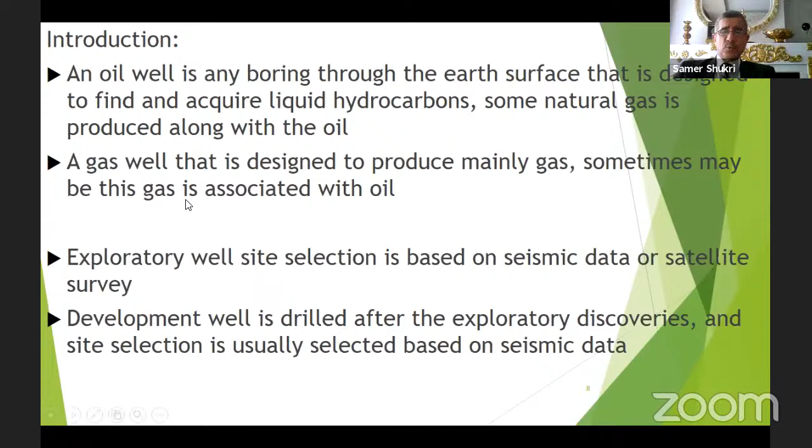You have huge fields in Iraq, like the Qurna field. What else? Kirkuk also, it is among the biggest fields in the world. Also many fields that can be developed. So after exploration, you have to develop this field and drill more wells so that you can produce this oil and gas during, for example, 30 or 40 or 50 years, plus or minus. In this case, you are working professionally and you plan production for each well.

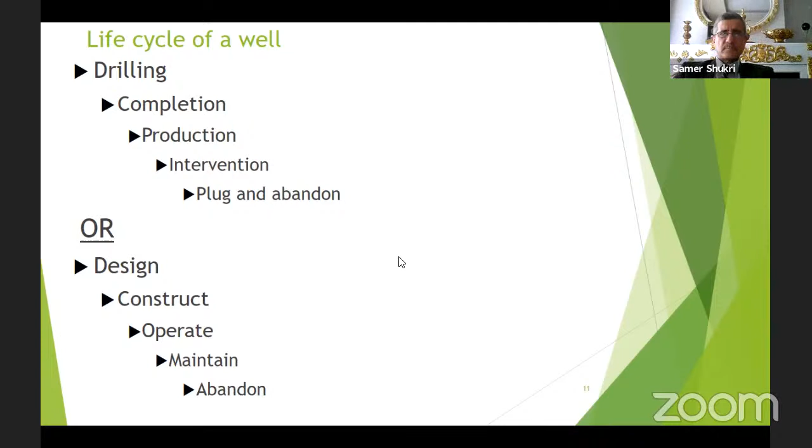Here you see well construction, it includes drilling and completion, then production, then maintenance. We have this maintenance, well intervention. Well intervention, we have 9 methods. Today we will study 3 of them. So workover is part of the well intervention methods, and the lifetime extension. We can extend the lifetime of the well as much as we can. Then plug and abandonment.

Here I will just tell you something about the well control certificate. I deliver courses for it. In the future, you are required to get this certificate if you want to work. We have 2 types, drilling and well intervention. You have to study these 2 mandatory subjects: completion equipment and completion operation. Then if you want to work in wireline, operator or supervisor, you have to do the wireline exam. If you want coil tubing, that is optional also. If you want wireline and coil tubing, you will do 4 exams.

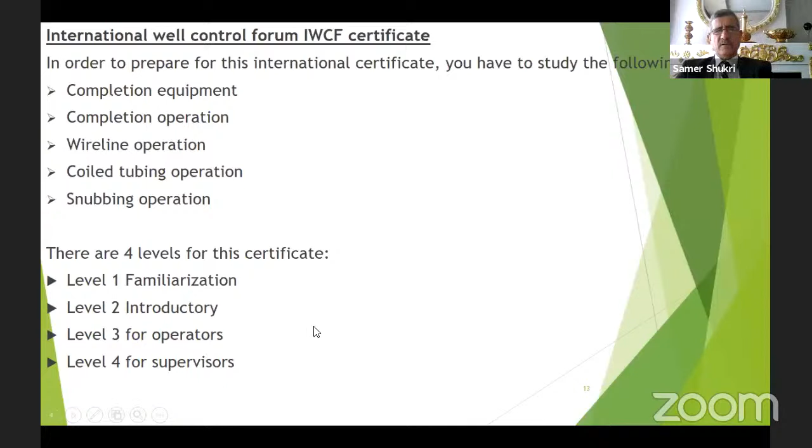We will talk now about wireline operations. Let us play this video.

Like many operations in the oil and gas service industry, wireline operations is a 24-hour-a-day job. Crews may work long hours in any type of weather to respond to customer needs. Wireline operations usually involve lowering and retrieving specialized equipment into the well, some for testing and some for plugging off zones in the well. Here, a 3-man crew shows us how a slick wireline is set up. First, by installing the blowout preventer on top of the well.

This is the lubricator. This is the slick line.

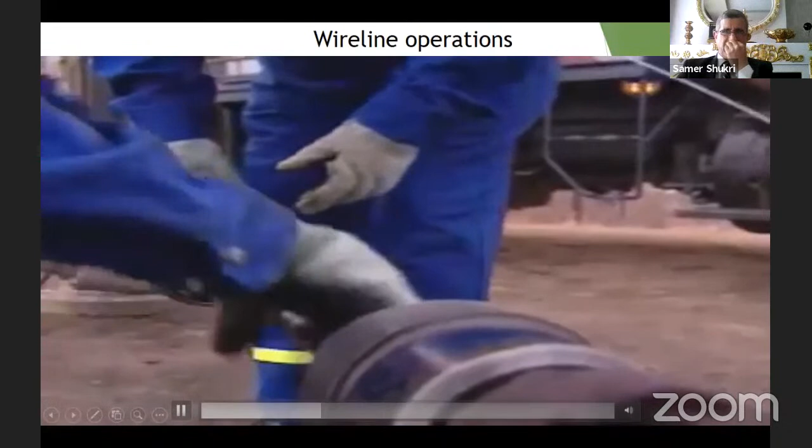Then the wireline equipment is assembled on the ground and the wire is threaded. Some can hold over 2,000 pounds and reach depths of 30,000 feet. After the string is together, a crane lifts the unit into place where it's secured to the top of the wellhead.

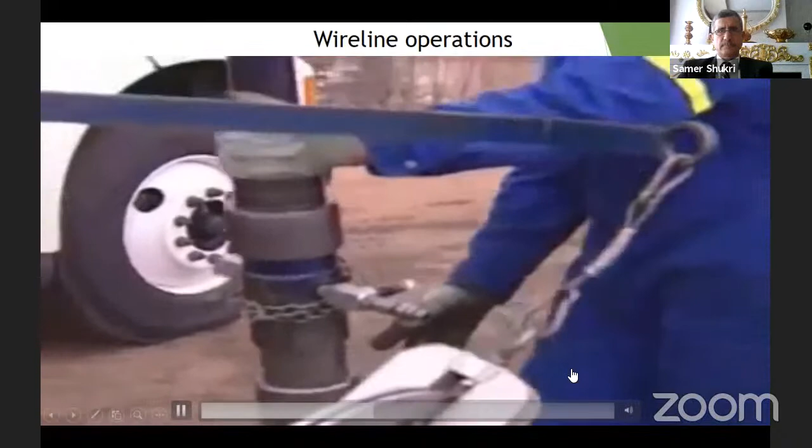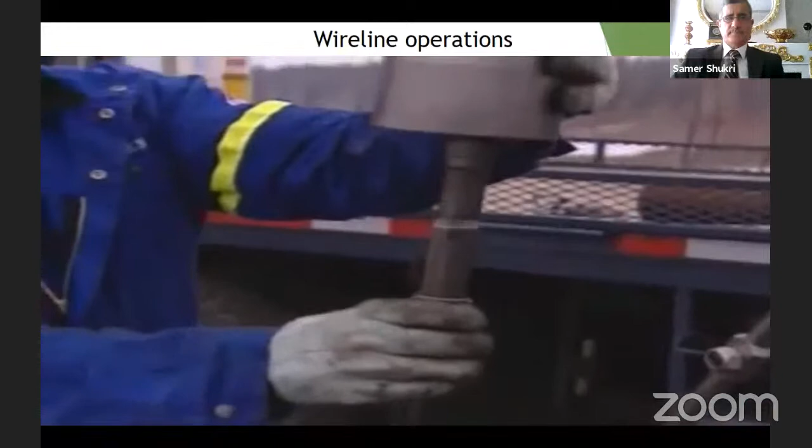You see, this is the rig up of the equipment. Once the pressure is bled, the wellhead is opened and the wireline is run into the well. At this site near Caroline, they're actually using slick wireline to retrieve tools that have become stuck deep inside the well during another company's service work.

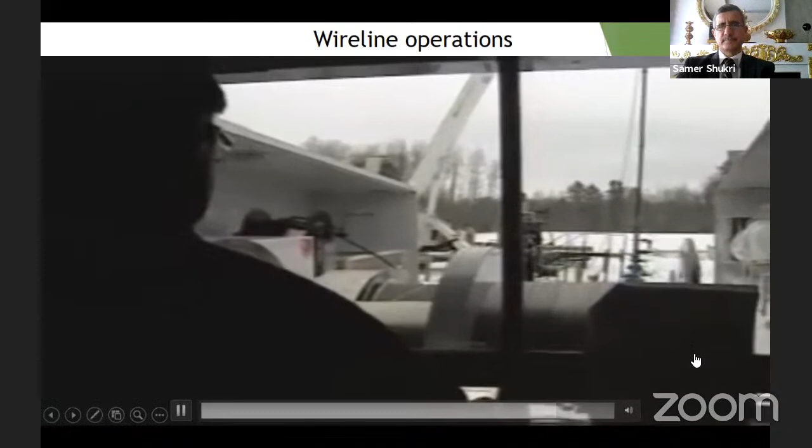Slick wireline operators are sometimes part detective and part fisherman, since they have to figure out how to grab something they cannot see nearly 3 kilometers below the surface of the earth. They're resourceful people who can think on their feet, and they're a vital part of the petroleum services industry.

So this is just to give you an idea about the rig up of the wireline. You saw each part. We'll talk about it in detail. This one, the well control calculations, you have to memorize it. Always I deliver it, and I ask the attendees to memorize it as if it were your name. It is very easy. It is very simple. You can memorize it over your lifetime.

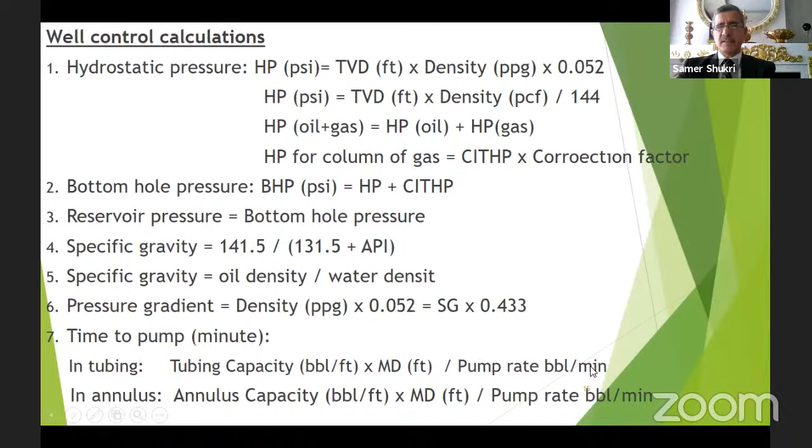Hydrostatic pressure equals vertical depth times density times a constant. If you have any question about any of these, you can ask about it. Bottom hole pressure equals hydrostatic pressure plus closed-in tubing head pressure, and so on. Also specific gravity, pressure gradient, time to pump, and this one. So it is easy, and you can have a look at it and memorize it.

Now we can move to the types of wells. We talked about this one, exploration or production for the type of the well. Also, as per the geometry of the well, it may be vertical, horizontal, or deviated. I will show you now the well schematic of each type.

Well types: as per the production phase, we may drill a well to produce oil. It will be called an oil producer. If we want to produce gas, it will be a gas producer. If we want to inject water, it will be a water injector, or gas injector, or WAG, water alternating gas injector, maybe a water supply well or water disposal well. So each type has its own function.

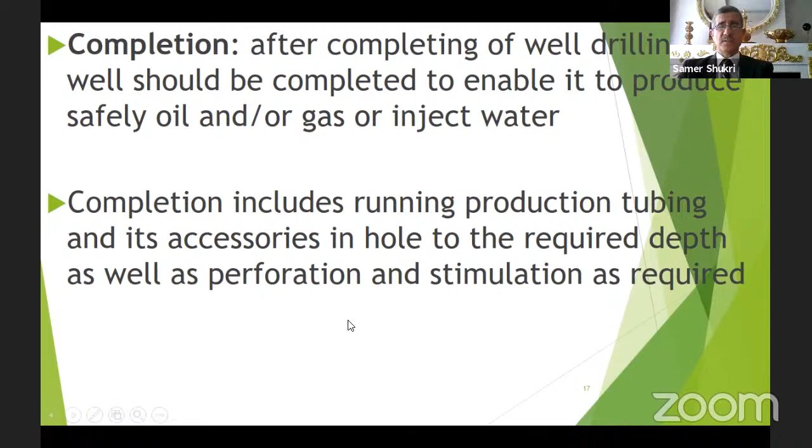Here the completion: after drilling the well, we run the completion, and we may want to produce from different zones. We isolate the upper two zones and produce from the lower one, or produce from the middle zone and isolate the upper and lower, and so on. So you have a strategy to produce from this well, and you need the completion to be suitable. Sometimes you run a single completion, sometimes a dual completion, sometimes a single selective completion. I will show you these, and we will also talk about the completion components and accessories used in each completion.

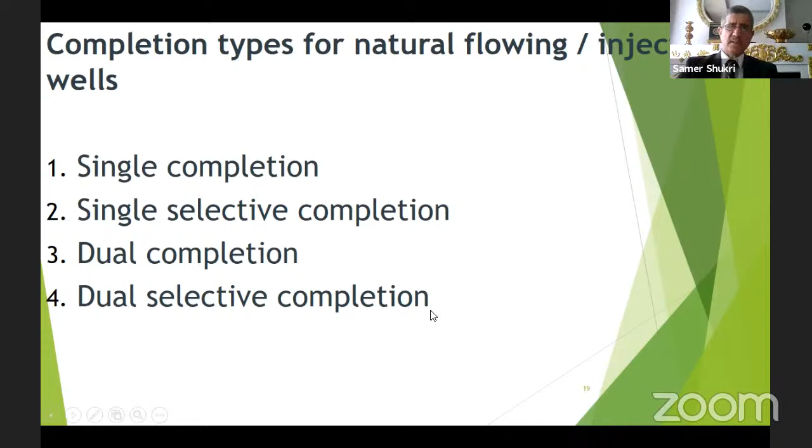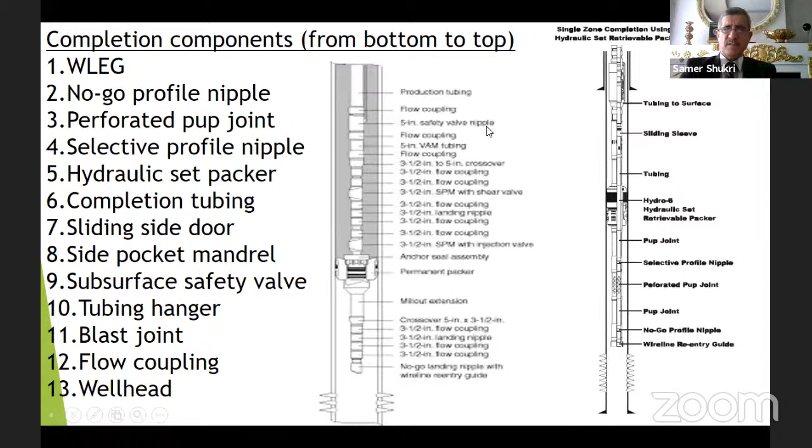Then the perforated pup joint, you see it here. We'll talk about them here also in detail. It may be more clear, more details. This is from the bottom: this is the wireline entry guide, this one, up to the wellhead. The previous one is from the top, from the wellhead to the bottom, but same components. You can see them. Tubing hanger: as I told you, when we run the completion, we hang this tubing using the tubing hanger. And here we have tie down bolts. We can also isolate the tubing from the annulus, so the annulus is isolated and no hydrocarbons, pressure or temperature will get into the annulus.

Here, the subsurface safety valve: when we have any emergency or any unplanned issues like fire, like explosion, then the subsurface safety valve will be closed automatically. There is an ESD system, and it is connected to the surface safety valve, which is the upper master valve, hydraulically actuated, and the subsurface safety valve. When we have any problem, fire, explosion, then it will be closed and shut the well automatically without causing any problem. So this we call the subsurface safety valve. We have two types, subsurface controlled and surface controlled.

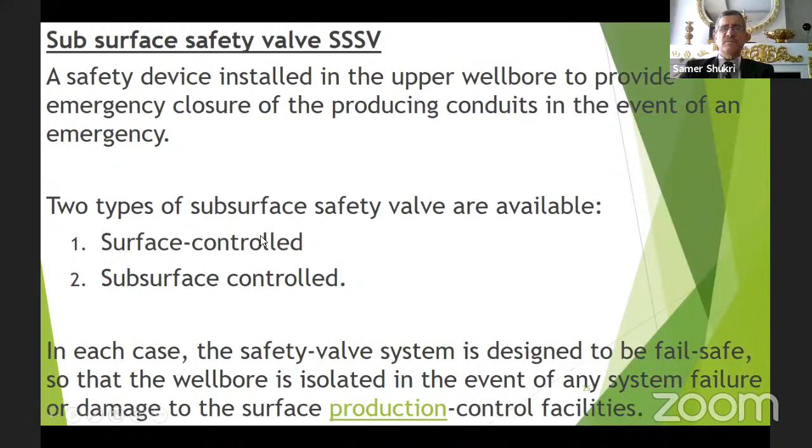With wireline, we have to check this subsurface safety valve. It could be wireline retrievable or tubing retrievable. For the subsurface safety valve, we have two types also, ambient pressure and differential pressure. This is run with wireline. The tubing retrievable safety valve is run with the tubing, with the completion, and the other one, the wireline retrievable subsurface safety valve, is run with wireline. We have to do maintenance for the wireline subsurface safety valve every 12 to 24 months, while for the tubing retrievable subsurface safety valve, we don't do it. Just exercise, open and close the subsurface safety valve. It may stay in the hole for 20 or 30 years. As long as it is working, no problem.

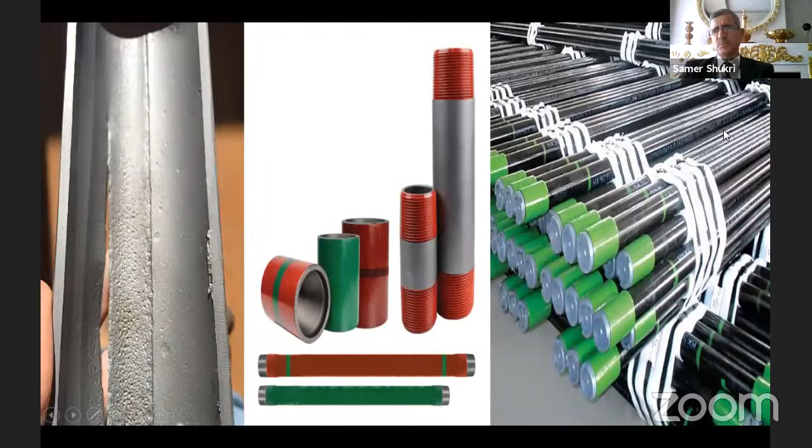Production tubing: when we run the completion, this is the main item, which is called the tubing. It may be 2 3/8 inch, 2 7/8 inch, 3.5 inch, 4.5 inch, 5 inch. 5 inch and more, it is then called casing. Below 5 inch, it is called completion or tubing. And we have couplings between them. You see, this is J55, the green one. The red one is C75. Each one has a different color. There is a black one, there is a gray. Those colors are higher grades.

This tubing may be damaged. You see this damage, it is exploded, or there is pressure from inside much higher than the outside. In this case, there is a rupture in the tubing here, or mechanical damage.

The packer, we talked about the packer. It isolates the tubing from the casing, and these fluids can be produced to the surface without contacting the casing. In this case, the casing will stay in the well forever without any damage, because the fluid from the well has high pressure, high temperature, CO2, H2S, all of these. We may also do acid stimulation. So if the acid contacts the casing, what will happen? The casing will be damaged, and we will be in trouble, and we will lose our well

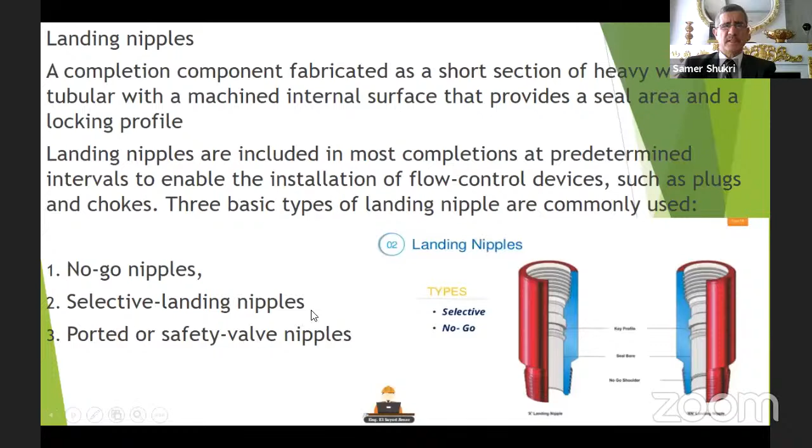and drill another well. Here, landing nipples, where if we want to isolate any zone, we can set a plug in this one, and we have 3 types of nipples: no-go nipple, selective nipple, and safety valve nipple. Circulation devices, we have 2 types: sliding side door and side pocket mandrel. This is the side pocket mandrel. This is a sliding side door, SSD. All of these have an internal sleeve.

The other type is called side pocket mandrel. It is also run with the completion. We set here either a circulation valve, gas lift valve, dummy valve, chemical injection valve, or a dump kill valve. We have different types of gas lift valves. We will talk about the gas lift system, but you have to get an idea about what this side pocket mandrel is, what this gas lift valve is.

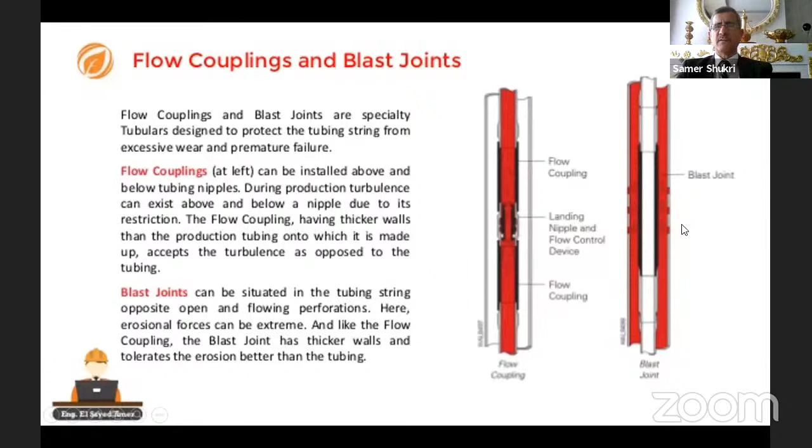Flow coupling, polished bore receptacle. Sometimes we produce hot fluids, hydrocarbons, and it will make the completion expand. When you heat up the completion, it is a metal, so this completion length will increase. If it increases, there should be something here to contain this increase or excess length of the completion.

We use the polished bore receptacle. Here we have a male and female part. We can seal on the outside of it, and here seal on the inside of it. It moves up and down inside, but it should move straight, within upstroke and downstroke, not off to the side. If it is like this, it will get out of the female, and in this case we need a workover.

And if it goes too much inside, what will happen? There will be unsetting of the packer, because there will be more pressure on the packer, and it will unset. In this case, we have to calculate the space out to be as reasonable as possible, maybe 20 feet. We could put it on the middle stroke, bottom stroke, or upper stroke.

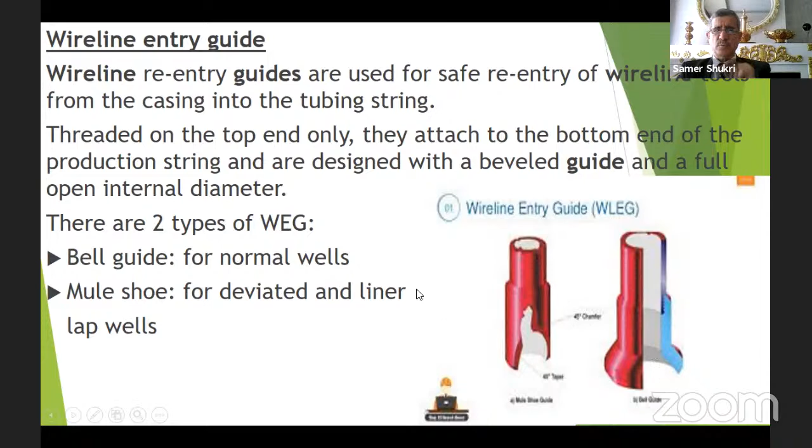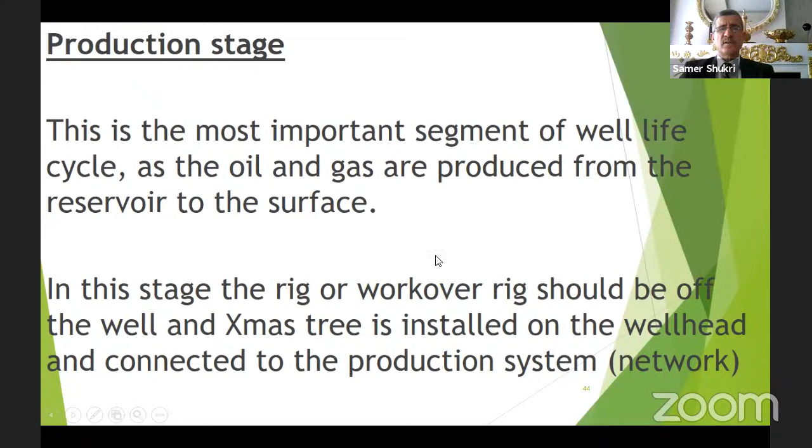Production stage. This is the most important stage in the well life cycle. We produce the well for 20 years or 30 years or 10 years, as we want, to reach our target.

Reservoir monitoring: we do reservoir pressure monitoring for the reservoir over the life cycle of the well. We have different types of surveys: bottom hole closed-in pressure, bottom hole flowing pressure. This is for oil producer and water injector. This is bottom hole flowing pressure for oil producer, pressure fall off survey for water injector, PBU for oil producer, interference test for both, integrity test always, capacity test for oil producer, and modified isochronal test for gas wells.

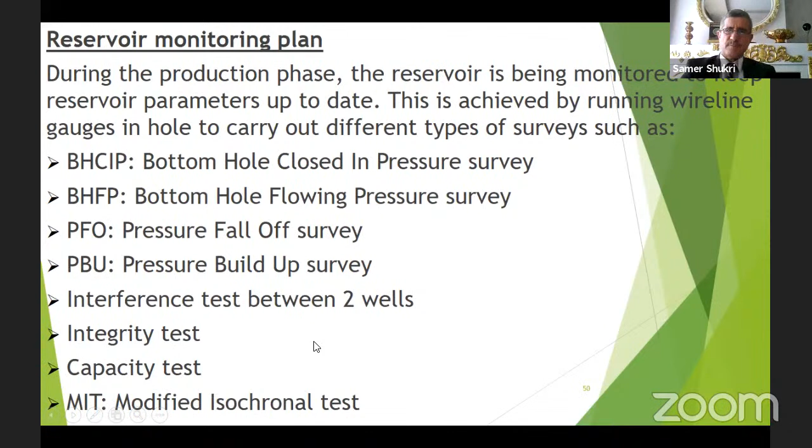We may not want to close the well. If we have an active well and we close it to do a survey, what will happen? The well will quit - it has high water cut. In this case, what can we do? We have to avoid closing it.

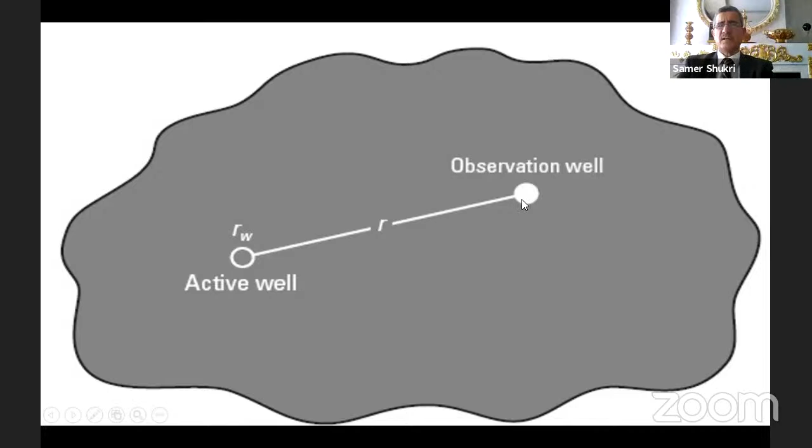We have a nearby well, far 300 meters away from this well, but they are producing from the same reservoir. In this case, we can take the same reservoir pressure here and here. This is called an observer well or observation well. This well can continue producing, but in the meantime we can measure the reservoir pressure. Well intervention.

Now all of this we talked about was an introduction. Well intervention is the fourth stage of the well life cycle, as we mentioned just now. So what are the main operations carried out on the well during well intervention operations? We have 9 operations. Here I give you just a quick review; in the next slide I will talk in more detail.

We have wireline. It was invented in 1927, and it has 3 types: slick line, braided line, and electric line. Then we have a new technology called electric line tractor, used in high deviated wells and horizontal wells. Coil tubing was invented in 1962. Hydraulic workover has been around a long time, but now it is rarely used, and workover.

This is the summary, but if we go into details we will find 9 operations. We start from pumping - the simplest form of intervention. If we want to pump corrosion inhibitor, diesel, or fresh water into the well, we can bullhead or kill the well by pumping, or rig up on the kill wing valve and pump from this well.

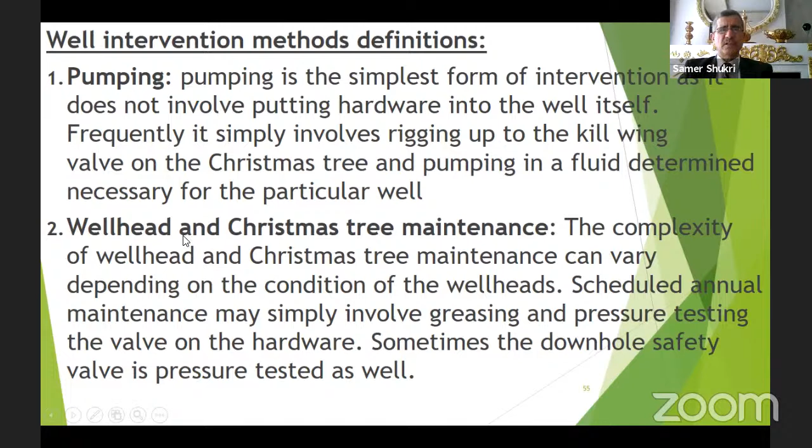The third type is slick line, which we will talk about. Slick line operations may be used for fishing, gauge cutting, setting and retrieving plugs, deploying or removing wireline retrievable valves, and memory logging. It is a very big subject - you cannot imagine any well in our oil industry that doesn't need slick line. It is 100% mandatory in each well. You will see now what we are talking about.

The fourth type of well intervention is braided line, used in two cases. First, if we want to fish a stuck tool string - sometimes we get a stuck tool string with wireline. In this case, what will happen? The maximum pulling tension for slick line is, say, 2,000 pounds, but braided line may take up to 10,000 pounds. So this is used for fishing.

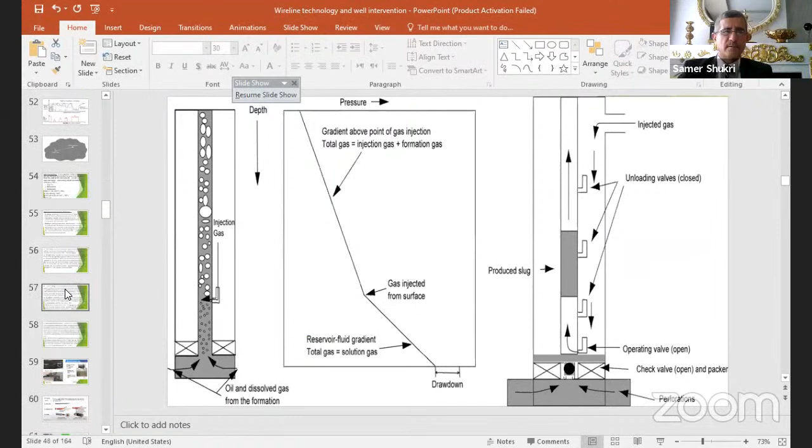Screen. The screen, you see it? Zulfaqar, I see resume. Resume sharing. Yes, now it is okay. I pressed something. I don't know. I will continue here. Yes.

Workover: in some older wells, we need to change the reservoir from the bottom to the upper. In this case, we have to isolate it, pump cement, or set a bridge plug, and above it set 3 meters of cement. Then we have to perforate, do stimulation, and run a new completion with a different design of the well. In this case, we need workover.

We also have subsea well intervention. This is for offshore operation. It is more complicated, more complex than onshore operations.

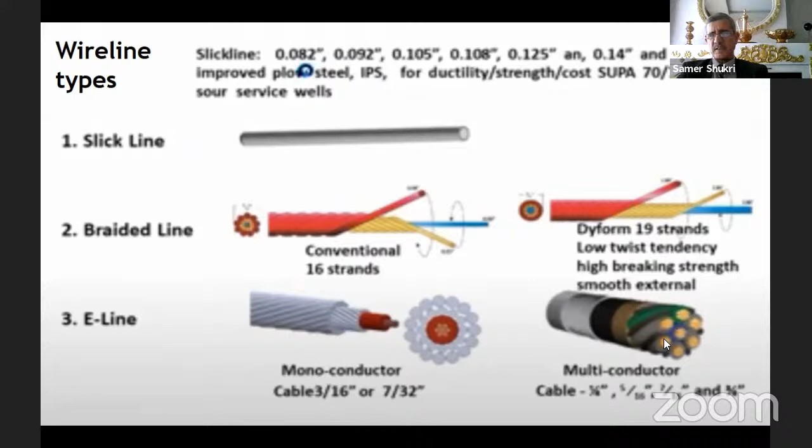You see, these are the three. This is slick line. It has two main ODs, 0.108 and 0.125, so two OD. Here, braided line, the main OD is 7/32 or 3/16. We have two types, conventional and Dyform. Dyform has more strength than conventional. And electric line, we have monoconductor and multi-conductor. Here, this is brass, and we can send electrical signal.

Here, slick line, wireline. We have these ODs, 0.108 and 0.125. We have two types, carbon steel and stainless steel. Carbon steel has higher tension pulling than stainless steel, but stainless steel can work in sour gas wells. Also, the OD is bigger here, 0.108 and 0.125 inch. This is the slick line.

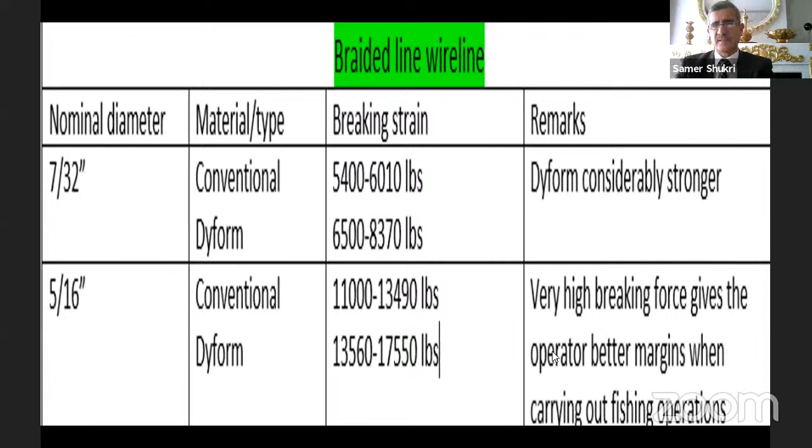Now we can go to slick line. Slick line, we can use it for fishing, gauge cutter, setting and removing, all of these. Slick line is very simple. It needs only 2 or 3 persons to move, rig up, run in hole, pressure test, and do all of these without any complexity. It has two nominal sizes, 0.108 and 0.125 inch OD.

And it is made of carbon steel or stainless steel. Carbon steel is stronger, but it cannot work with H2S more than 30 ppm, parts per million. If you have an H2S percentage of 30 ppm and more, in this case you need stainless steel that is corrosion resistant for H2S. But in this case, the tensile strength will be less than that for carbon steel.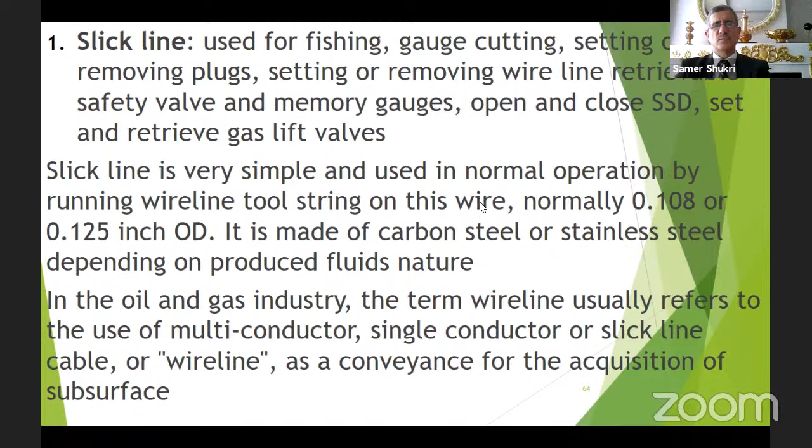And it can be run in oil wells: oil producer, gas producer, water injector, gas. So all of these wells can be used with this slick line, and we can run wireline tools. The slick line is called a piano line or solid line or measuring line. This is for slick line. So this slick line, we call it piano line, solid line, wire line, or measuring line.

And we have two types, as we mentioned, carbon steel and stainless steel. Carbon steel has advantages: it has high tensile strength, as I told you now. It has low cost. If you go to stainless steel, it is expensive. We have also good ductility, and it can be used in sweet wells and with H2S up to 30 ppm. After that, you need to use stainless steel.

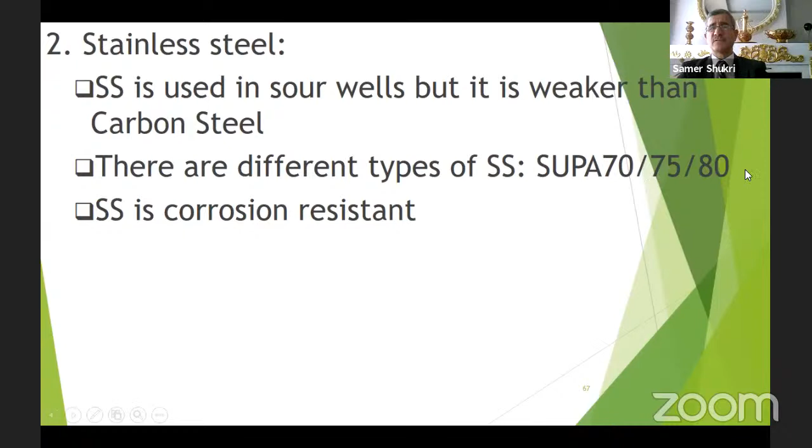This is stainless steel. Stainless steel is used in sour wells, but it is weaker than carbon steel. There are different types of stainless steel. We have SUPA 70, 75, and 80. Stainless steel is corrosion resistant.

Wireline, proper handling to reduce bending stresses. How can we make this wireline safe and utilize it for the maximum period of time? We have to follow the following steps. First, we have to reduce the fatigue and bending stresses on the wire by making a proper connection of the rope socket with the wireline on the drum.

The second one, we lubricate, especially when we first run in hole. We put grease on the wire so its movement across the stuffing box will be easy and simple, to avoid and reduce the friction. From time to time we can cut 50 feet of wire line and make a new rope socket. Also, during jarring operations, it is advised to stop for a short time because this wire will heat up.

If it heats up, it will be broken easily after that. So we stop for 20 or 30 minutes to make it cool down. After that, we continue. We may also need to move the wireline truck. If we jar up for 30 minutes in the same area, jar up, down, then jar up, down, then jar up, or the opposite, what will happen? There will be a weak point in this area.

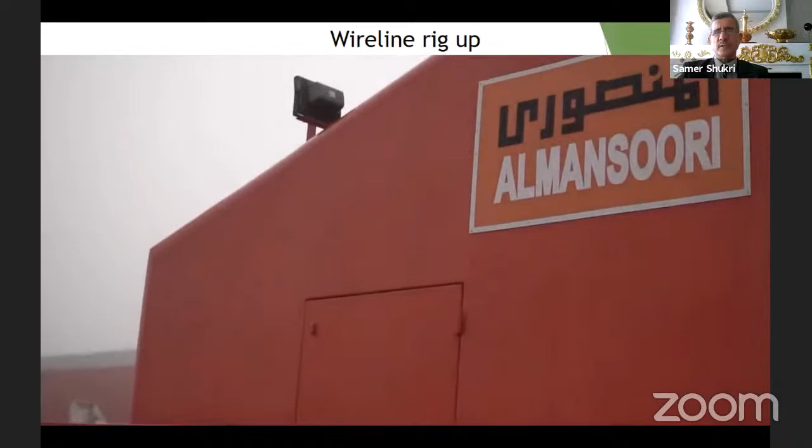We talk about wireline rig up. Do we see it or not? This is for Almansoori, a different rig up. It is interesting. Let's watch it. This is in Abu Dhabi, I think.

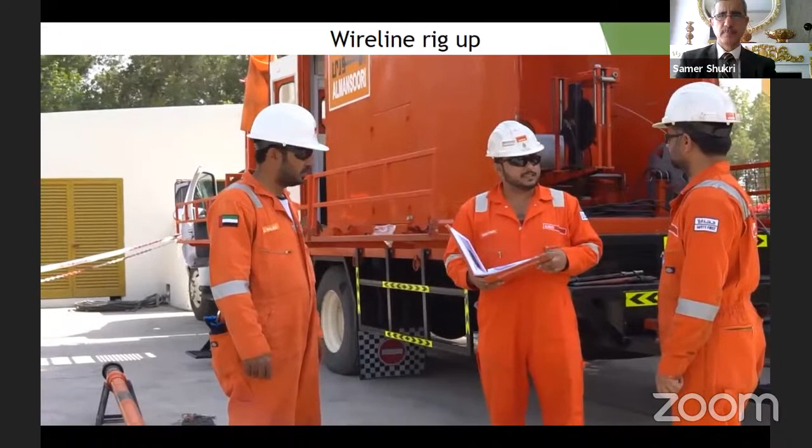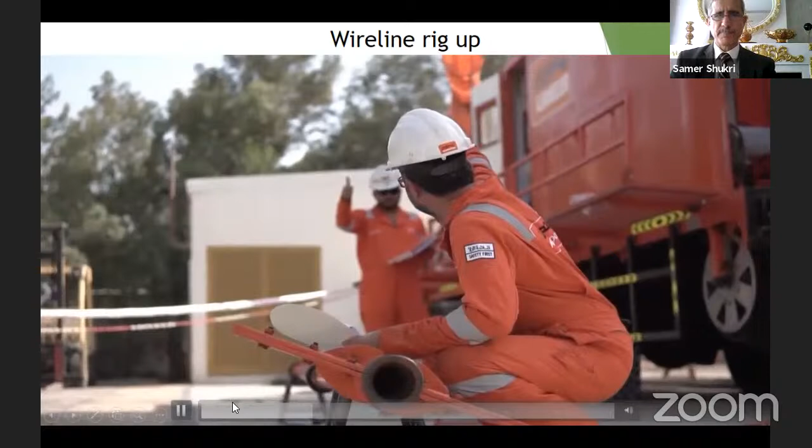They do a safety meeting, then rig up. This is the BOP. This is the stuffing box and the hay pulley. Riser. They do a pressure test, and this is the chart. Lubricator sections, quick union. This is the hay pulley, stuffing box, rope socket.

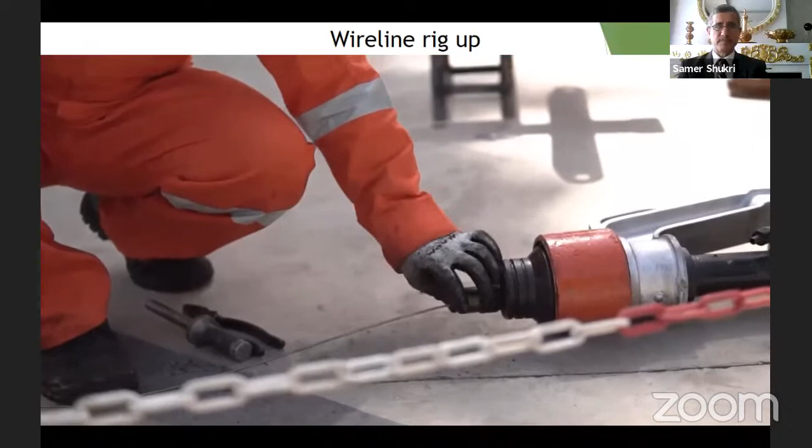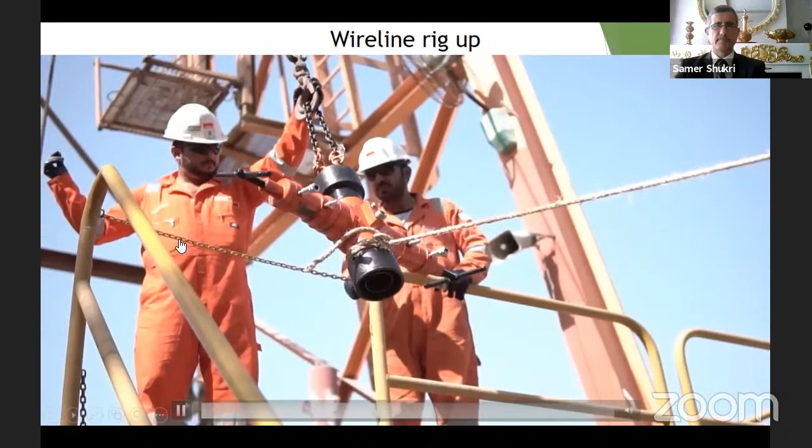Gauge cutter. This is the rope socket. This is the rig up on the wellhead. I worked with this crew, I think. Open the swab valve. Take the zero, then run in hole.

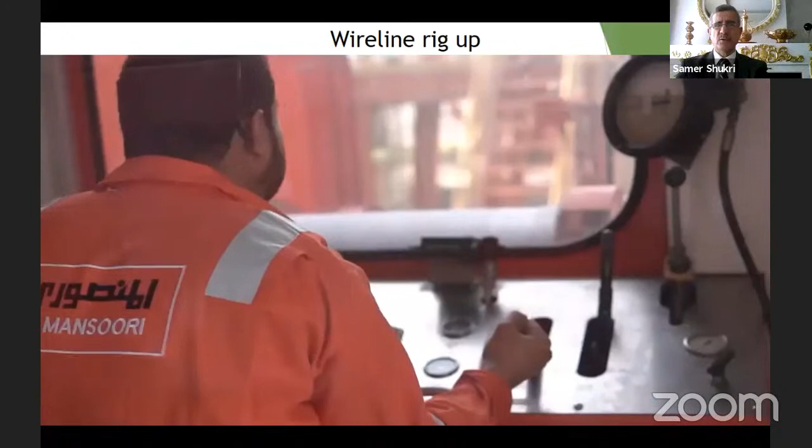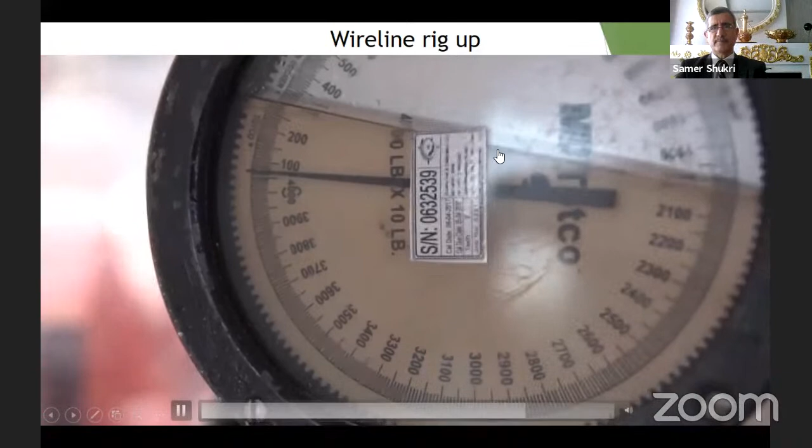This is the wireline operator. This is the drum. Hay pulley. This is on the rig counter of the wireline. Run in hole. Martin Decker for weight. Run in hole. Here is the safety valve, subsurface safety valve.

Stop. Then latch, pull out of hole. He is retrieving the subsurface safety valve. Here is gauge cutter first, just to locate the safety valve.

The video is finished. I think it is interesting. Let's move on to the next slide.

Yes. Now we can move to the advantages of using wireline over coil tubing. Wireline is easy to move and transport within 1 hour. They can move, rig up, pressure test, and start running in hole. 2 or 3 persons, you saw them, 3 persons can do all of this, safely and very easily. Also the cost, it has a very low cost.

The crew members: coil tubing needs maybe 7 or sometimes 10 or more persons to operate the package, while here 2 or 3 persons only.

The disadvantages of wireline over coil tubing: here we have low yield strength compared with coil tubing. The maximum tension that you can apply here is maybe 2,000 pounds, while with coil tubing you may apply 40,000 pounds or 50,000 pounds. So a big difference. Cannot do rotation using wireline.

With wireline, you cannot do rotation or do pumping through it, while with coil tubing, you can do that. Also, cannot do circulation using wireline. The other issue, you cannot work in highly deviated wells and horizontal wells. Highly deviated wells more than 70 degrees and horizontal wells also.

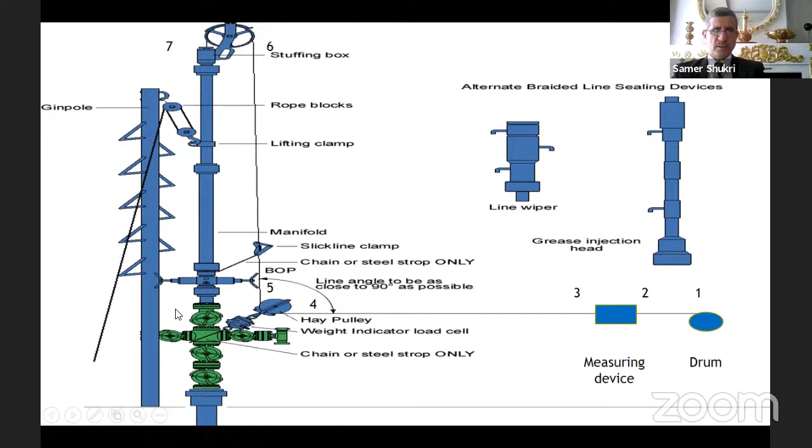We have here bending events, one here, then two before the measuring device, three, then hay pulley, 4, 5, then the stuffing box, 6, 7. So these we call bending events. So 7 in run in hole and 7 in pull out of hole. So 14 is the number. Bending cycles, we have these ones, we mentioned them.

The same events when pulling wireline out of the hole. So 7 during run in hole and 7 during pull out of hole. These we call 14 events, bending events. For bending cycles, we have 7. That is just in run in hole.

You see it, hay pulley angle. This is the hay pulley angle. When we have it like this, 90 degrees, what will happen? The reading on the counter will be accurate. But if this angle is less than 90 degrees, then the reading will be more than the real reading.

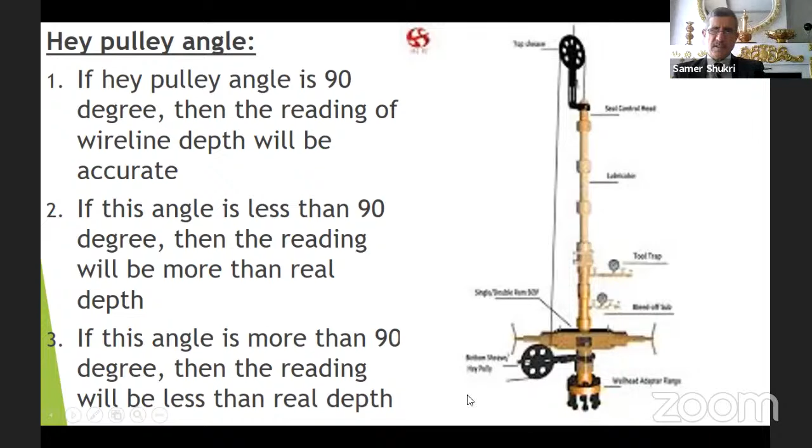This is 90 degrees, say 80 degrees. So if it is like this, it will give more reading. The third case, if it is more than 90 degrees, if it is like this, it will give less reading in the depth.

In the tool string, we have the following items. Rope socket, we saw it, that is connecting the wireline with the tool string. Stem bar, that gives weight to the wireline tool string. We have 2 or 3 or 5 feet.

Mechanical jar, it acts like a hammer. This hammer is making the action, hammer up or hammer down. Wireline knuckle joint: if we have a deviated well or we need more flexibility for the tool string, in this case we run it between the sections of the wireline tool string.

At the end, we have the wireline running or pulling tool for running and retrieving devices from the wellbore. We have different running tools, different pulling tools, different fishing tools, plugs, all of these, we can use them.

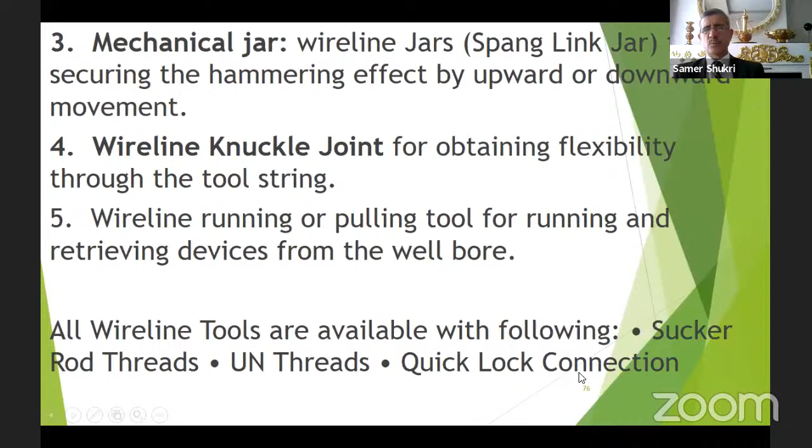Here, barriers: we have 3 types of barriers for wireline. We have a primary barrier, secondary barrier, and tertiary barrier. This is pressure control equipment. For slickline, the primary barrier is the stuffing box, we saw it. The secondary barrier is the BOP, and the tertiary barrier is the hydraulically operated upper master valve.

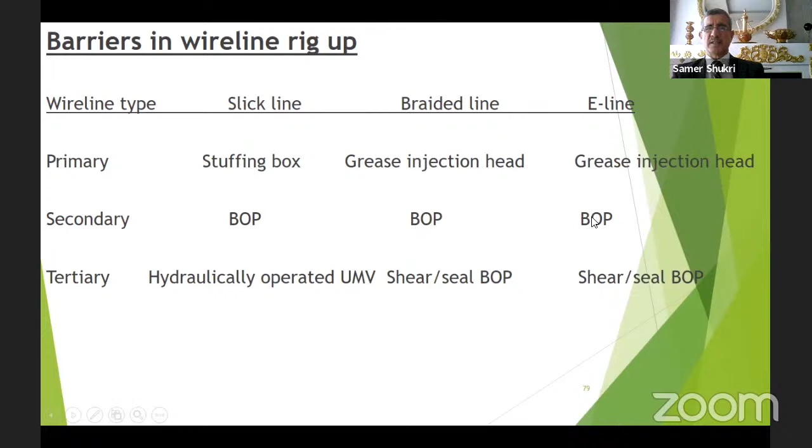You see, a wireline operation can be carried out on live wells and dead wells. In live wells and dead wells, in this case, we should have a minimum of 3 tested and verified barriers.

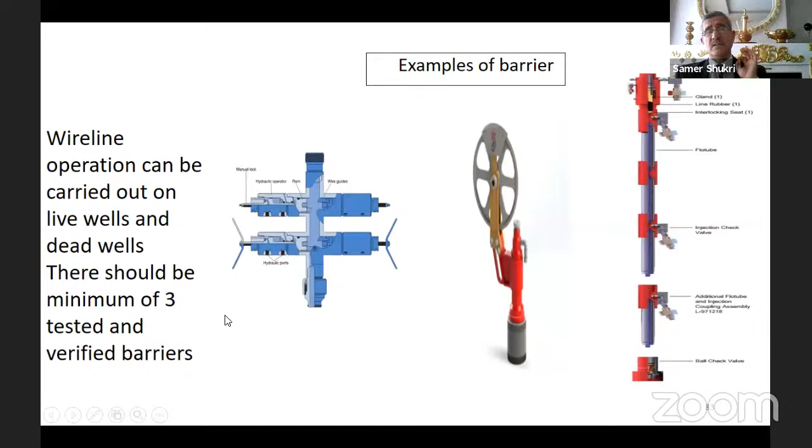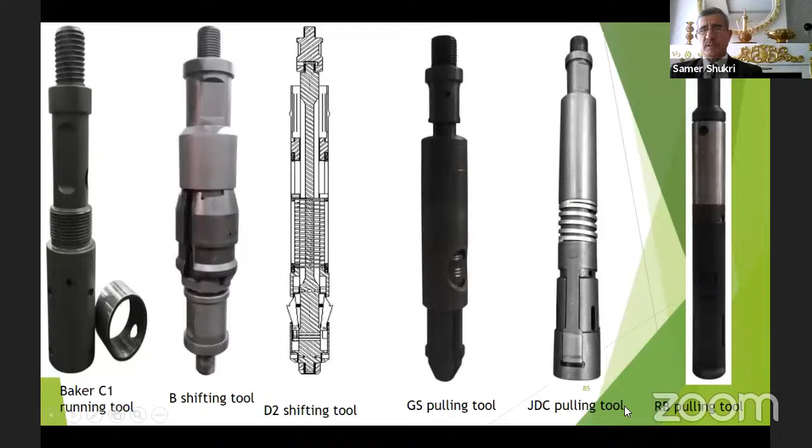We have a spear, internal fishing neck. We have a blind box if we want to cut the wire. Gauge cutter just to drift the well. Knuckle joint for deviated wells. Swaging tool: if we have damage in the tubing we want to fix, we run this swaging tool. Sample bailer: if we want to take a sample from the bottom hole, either fluid or solid or sand or scale, we can run it and take a sample.

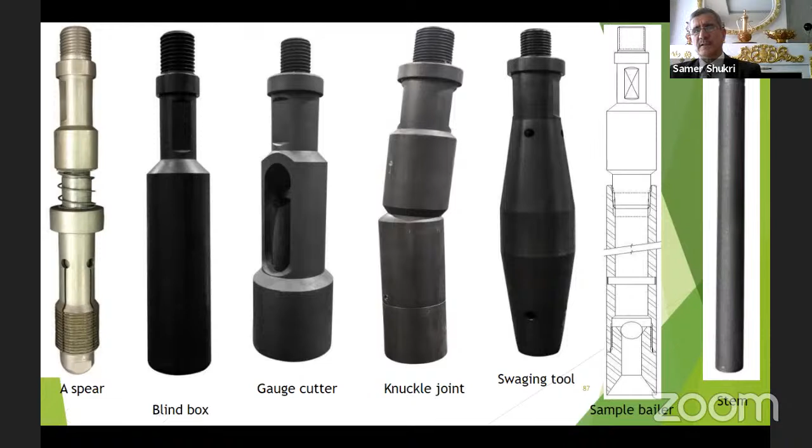Wax knife also, we can cut the wax. It is like solid oil depositing on the internal side of the completion and the completion components. In this case, we can cut this wax, retrieve, and continue production at the same rate as before this obstruction, which is wax, heavy oil depositing on the internal side of the tubing.

Tubing end locator: if we want to locate the last end or bottom end of the tubing, we run this tubing end locator with wireline below the wireline entry guide. When we pull it, this will stop it. If it stops, the tension will increase. Then we pull very fast, this will be broken, and we know that at this depth we have the wireline entry guide.

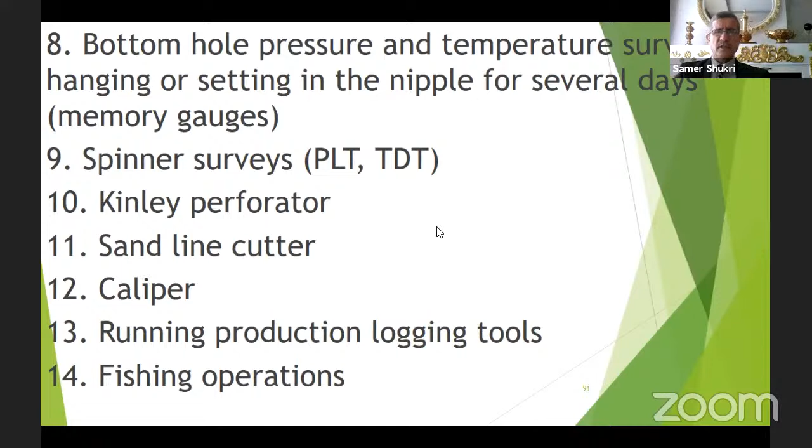We are coming now to the types of the logging tools: open hole logs and cased hole logs. We will do them. Also, we have fishing operations. If we have stuck tools, we can do fishing, paraffin, wax, scale cutting, chipping ice, lubricating long assemblies, bottom hole sampling, detonating perforating guns. So all of these, we cannot say that we do a small job. We have too many. The operation is very variable, and we can take much benefit of it.

Detect the fluid level if we have gas, oil, and water. So how can you do it? We run the blind box, and at the interface between gas and oil, the weight will drop suddenly. Why? Because there is a buoyancy factor for the oil more than the gas. In this case, the weight will drop dramatically.

Also, if you are running in the oil and you face the oil water fluid level, in this case also the weight of the tool string will drop. Why? Because the buoyancy factor of the water is higher than the oil, and so on. So we can utilize it and see why the well is dead, what is the reason, or if you want to kill a well, you want to take this data also.

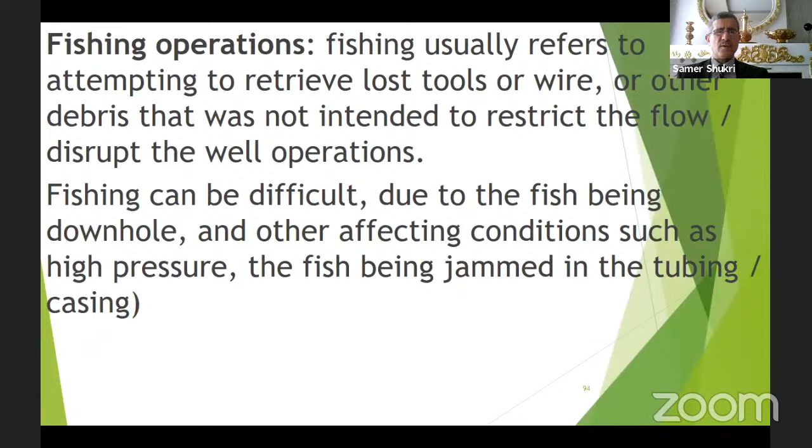Braided line, we said that it is for fishing stuck wireline tool string, and for swabbing. Normal size is 3/16 inch. These are types of braided line: conventional and Dyform. Advantages: it is made of synthetic solid materials and can take more tension than slick line.

Also, we can say that many braided lines are very difficult to break. It is not easy to break, same as slick line. Braided line can also have a longer reel life, because we don't use it continuously. We use slick line continuously, but this one we use from time to time. Maybe during 1 month, you use it 1 week, not more than that. So it is stronger and more solid.

Disadvantages of braided line: one disadvantage is when snagged, it sometimes becomes very difficult to break. If it latches the tool string of the wireline and you cannot retrieve it, what will happen? Disengagement is not easy at all. So you have to consider this one. Also, braided line is generally more expensive.

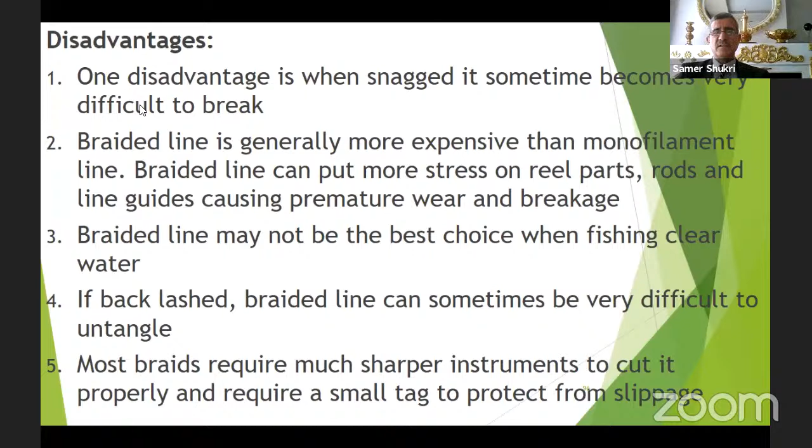Electric line: you have logging, perforation, and water shutoff. Wireline logging, we have two types of wireline logs: open hole logs and cased hole logs. Anyone who has any experience in logging, just tell us what are the types of logging that are used. Tell me the types of open hole and cased hole. Anyone who has the answer can raise a hand. You can look at them here and read them.

Yes, Mr. Abdul Fakar, go ahead. No problem. You are one of us. No problem. Open hole logs. What are the types? Tell me.

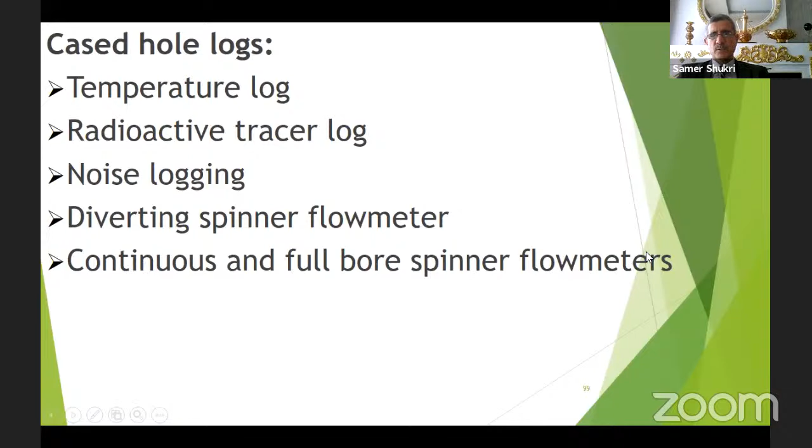We can go to cased hole logs: temperature log, radioactive tracer log, noise log, diverting spinner flow meter, continuous and full bore spinner flow meters. We can take an example, the noise log. If we want to see where the leak is coming from, behind the intermediate casing, the production casing, or the surface casing, from casing to casing, casing to annulus, or annulus to tubing, this noise log will give us an idea and determine what is going on.

It needs 2 days. First day, we take the background in the well. The second day, we do the main job and identify the flow path using the noise. You see it here, we have the leak from here to here. In this case, there will be sound, and we will hear it with this logging tool.

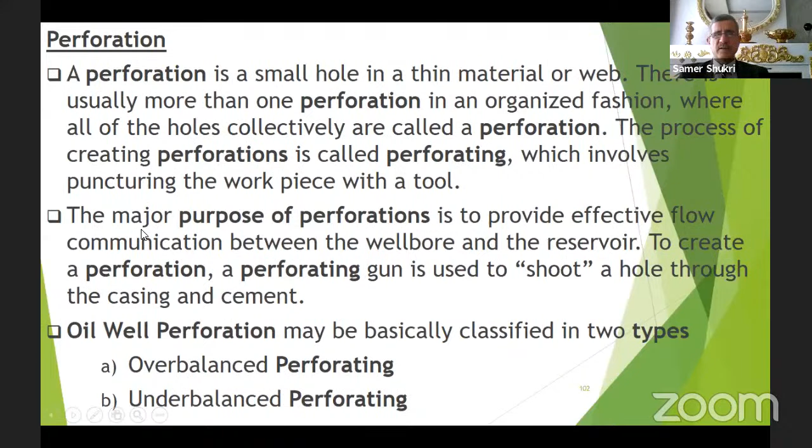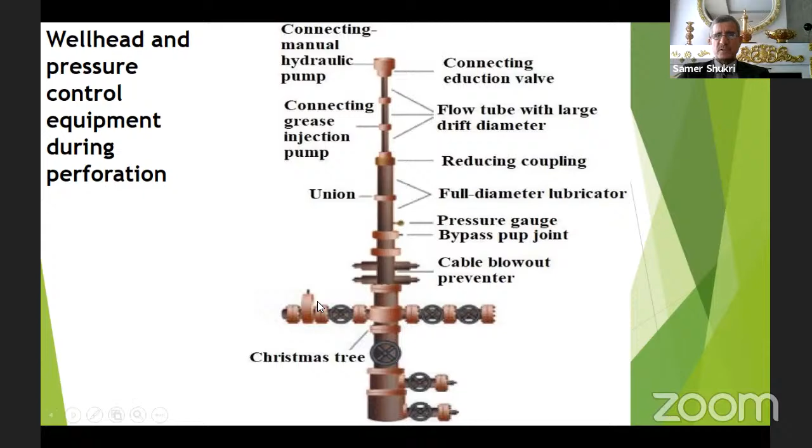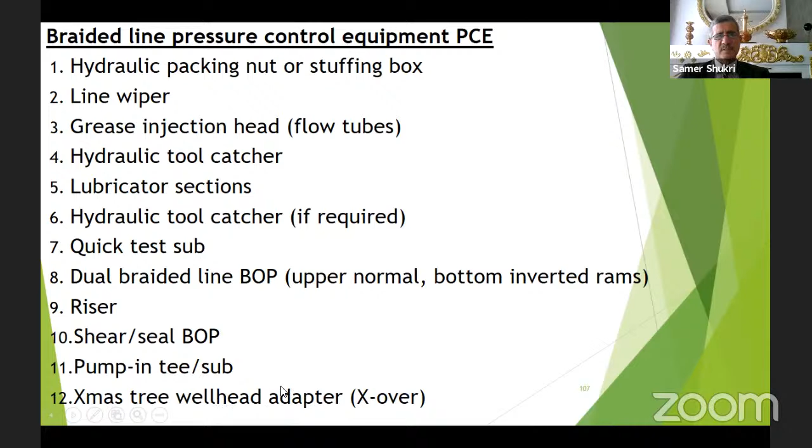This one also repeats the standard wireline equipment result, here for the braided line. This is for the wireline pressure control equipment for wireline and braided line on electric line, of course.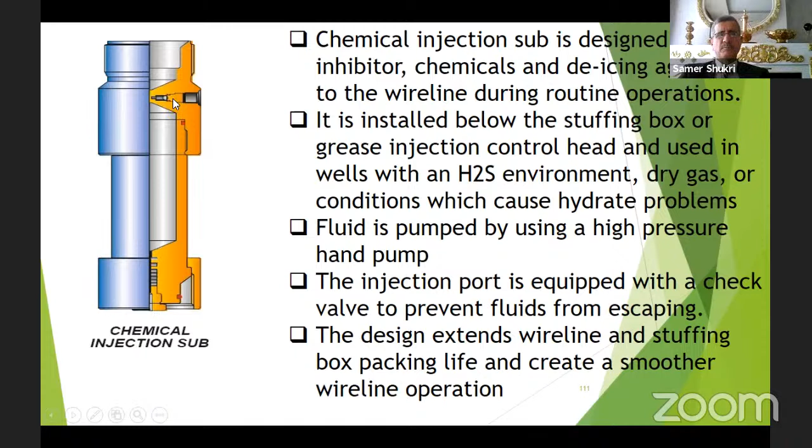Here we have the chemical injection sub, if we want to pump chemicals, pump lubricant, or pump chemicals for dehydration. If we have hydrates, we can pump methanol or glycol. All of these go through the chemical injection sub.

We have a hydraulic tool catcher. If the wireline operator is pulling the tool string fast to the surface, the wire may get cut because he has to pull out of the hole slowly. So if it is cut, it will not drop in the well, because this hydraulic tool catcher will catch it.

You see these are the risers, the lubricator, 2 or 3 pieces of riser. It is called the lubricator. It should have a bigger ID than the outer diameter of the tool string. It should have a length enough to contain the tool string of the wireline, and the lower section should have a bigger size than the upper sections to contain the tool string that is run on the wireline.

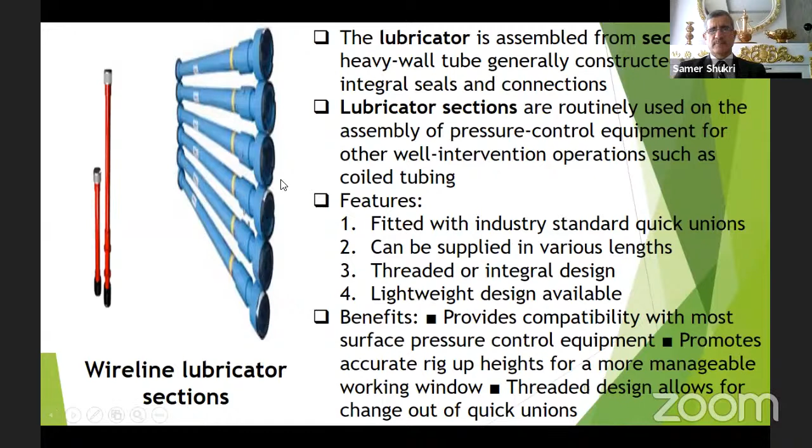You see, this is what we call the hydraulic tool trap. The tool string is going up, then it will not go down. Even if the wireline is cut, it will not drop down the hole.

Quick test sub: if we do different runs in the well, for example perforation, we don't do the same pressure test every time. What will happen? We do it only in the beginning for the whole pressure control equipment, then for the runs that are done later, we do the test from this one only, between two O-rings. If it is okay, we can continue, especially if we have perforation. If we have perforation, and we increase the pressure in the lubricator, the guns may fire, and in that case you will be in trouble.

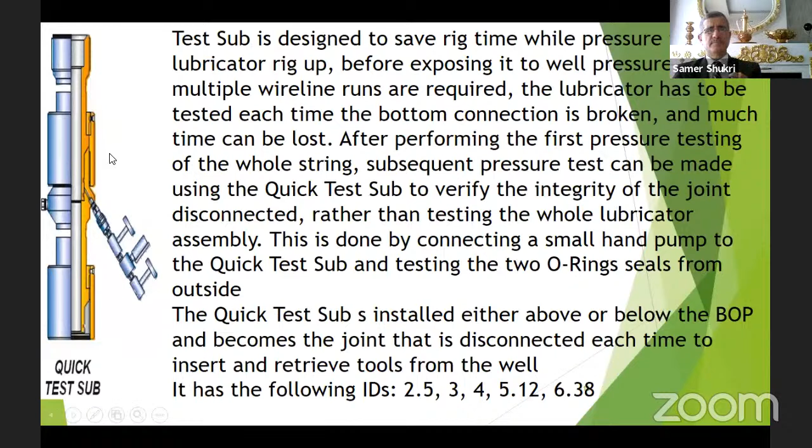Here are the wireline valves or BOPs. This is dual and this is single. We have the rams, you see them here. If you close it, you have to close it hydraulically first, then manually, this one. And it has a blind. Look at me like this. You see, the wire is included in this rubber. Rubber is here and rubber is here. If you see it here, there is rubber and here is the rubber. It is a blind like this.

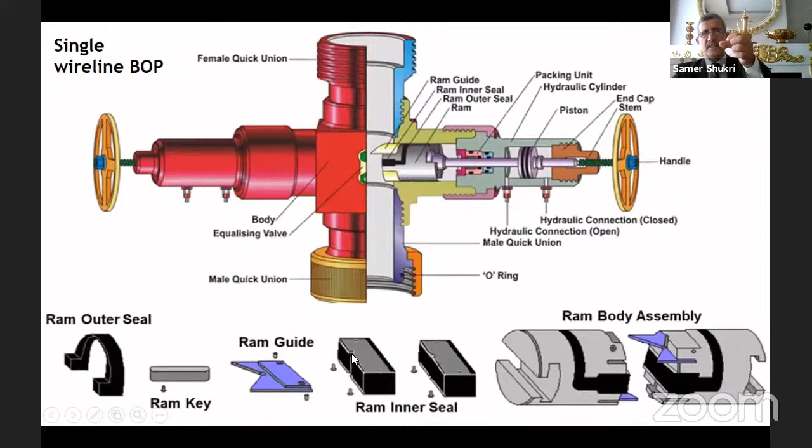Here is the single wireline BOP, and here are the pieces of it. Here is the ram inner seal, you see the blind, and here is the guide. So if we change this wireline BOP from this to braided line, we have to change these two pieces, the ram guide and ram inner seal, because with braided line there should be a groove here, since the cable is big, while here it is blind.

Here we have the pump-in tee. Sometimes we need to pressure test the lubricator or to kill the well. In this case, we rig up the pump-in tee or sub. We have a wellhead adapter also. These are plain adapters to connect the pressure control equipment to the wellhead and to the pressure control equipment.

Braided line stuffing box. We have it suitable to use with the braided line, providing a partial seal during applications such as swabbing. This is different than the slick line. It is a braided line, so even if you apply pressure on it, it will not hold the pressure.

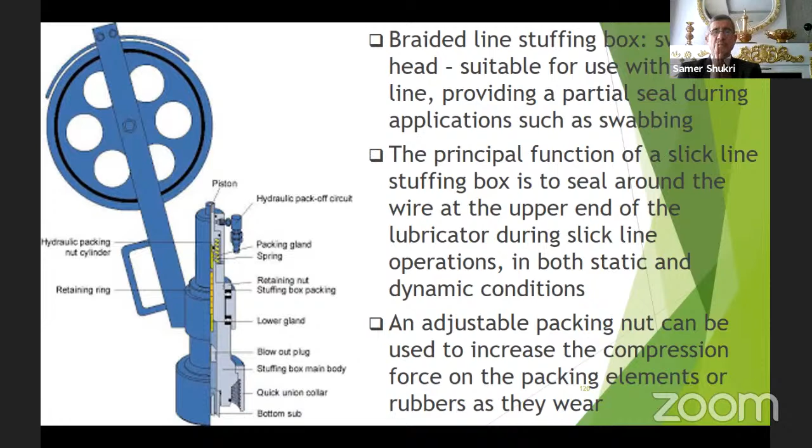There should be grease around it. How can we do that? Using the grease injection head. We'll go to it. You see, this is the grease injection head.

At the top you have a stuffing box. Below it you have this line wiper, the hydraulic line wiper. Below that you have the grease injection head. We pump the grease from the bottom flow tube, and we retrieve it, circulate it from the upper connection.

Any grease still in the wire line will not get out. It will go to the return drum or grease drum. So here we can achieve the seal around the cable using the pressure that is pumped here and retrieve it, receiving it here, as if circulating in and out.

The pressure should be 110% of the wellhead pressure. So if you have wellhead pressure of 1000 psi, you have to pump 1100 psi here, and you will achieve your seal. Working pressure for this line wiper is rated 3000 to 5000 psi.

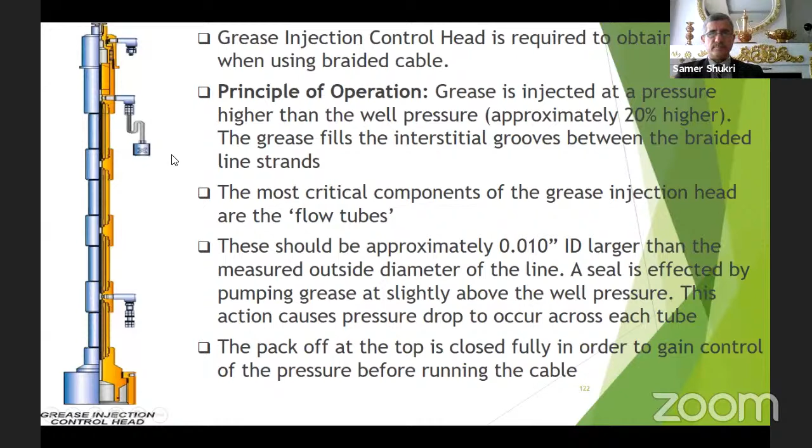The grease injection head, as we told you, injects grease from the bottom and we receive it from the top. The clearance between the braided line or electric line OD and the ID of the flow tube - here are the flow tubes, 3, 4, 5 or 6 pieces - makes up the grease injection head.

So if we pump here and retrieve the grease from here, what will happen in this case? Yes, we pump grease from here, and the waste will go to the drum here.

Here we connect the hand pump to the stuffing box, and we have also the flow tube, and here is the cable. The clearance between them is between 0.002 to 0.008 inch - very small clearance. So if you pump here, it will not take more than 1 or 2 liters during the whole operation. In this case, you achieve your seal around the cable and work safely.

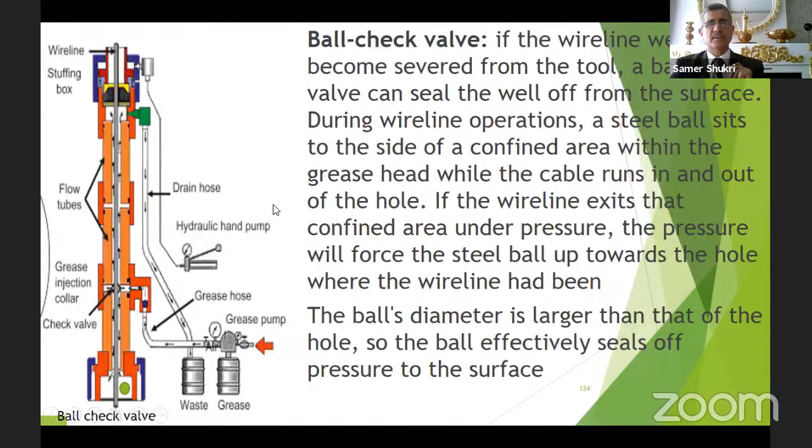While in the stuffing box of the wireline, we call it the blowout plug. I will show you what this blowout plug is.

The reasons for braided line grease seal leak - sometimes the grease is not working very well, so we have different reasons. This is more detail, if you don't need it, but if you want to look at it, it is here. To prevent leaking from the grease injection head, you have to run in-hole slowly and increase the grease injection pressure to 110% of wellhead closing pressure, helping the grease flow into the well rather than out of it. Pass a well-greased section of wire through the flow tube.

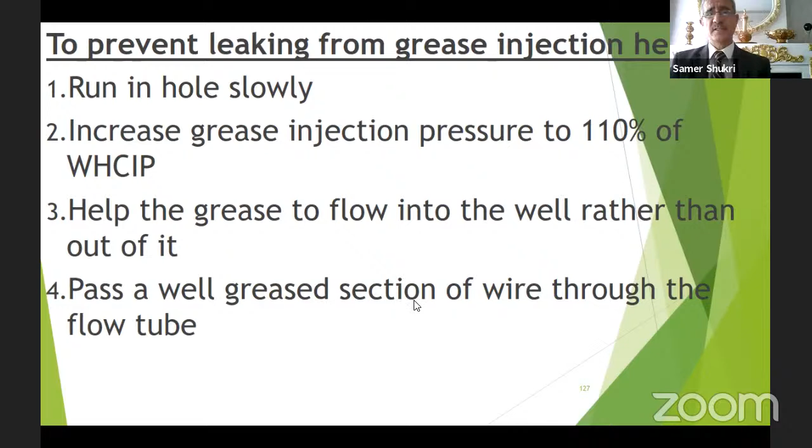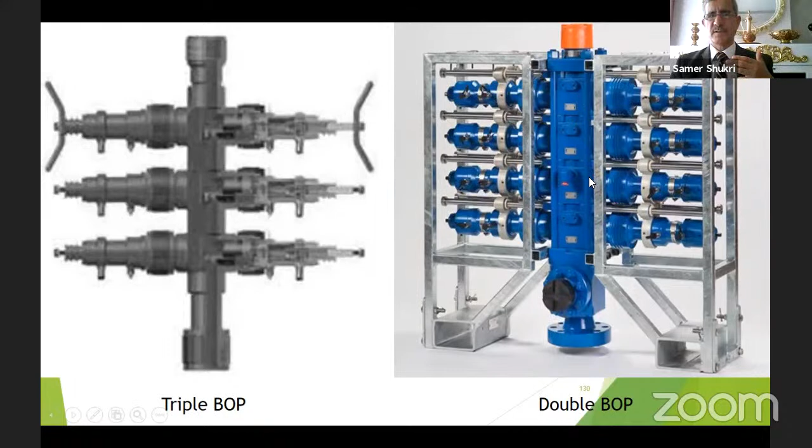Here is the shear seal BOP. This is the tertiary barrier, because if the primary barrier, which is the grease injection head, and the BOP, which is the secondary barrier, failed, what will happen? We have to go to the tertiary barrier, which is the shear seal BOP. Here the rams, you see this ram as if a knife. It will cut the cable and make the seal. You see it? It is very clear for you.

In this case, you can make a seal and secure the well, because the primary barrier has failed, secondary barrier has failed. What can you do? Go to the tertiary barrier.

If we have wireline, we can blind and do the blind. If we have braided line, we put a test bar and close it and inject grease between the 2 rams and see if there is any leak.

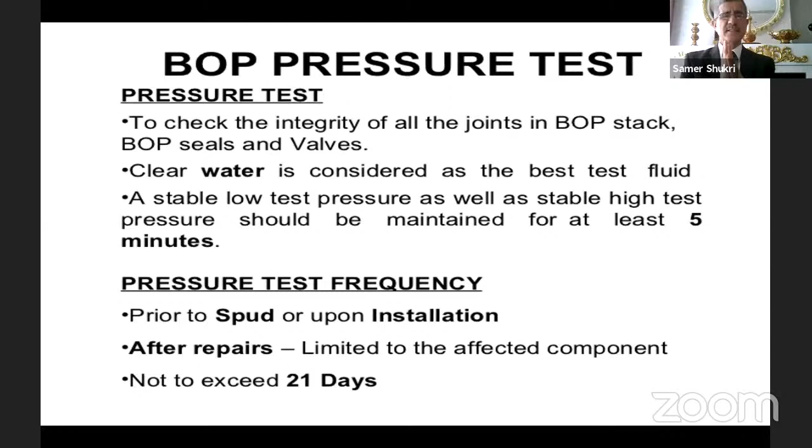This test of the BOP should be done in 2 cases: when we want to start an operation, and the other one when we suspect a leak. In this case, we send this BOP to the workshop and bring a new and tested one, and do pressure test and function test before rigging up, before running in hole. In this case, we are making sure that we have a certified and tested barrier, and the testing should not exceed 21 days.

Here also we have two tests, low pressure and high pressure. Low pressure, if we have to do it, between 250 and 350 psi for 5 minutes. For high pressure, we do it at 110% of wellhead closed-in pressure for 10 minutes.

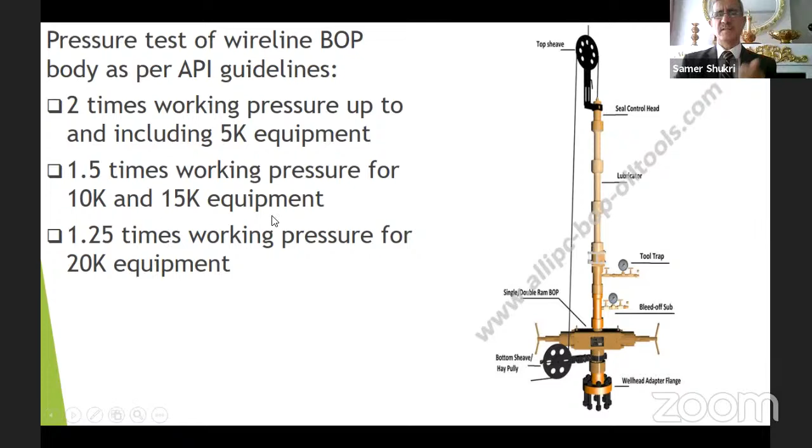And here is the pressure test of the Wireline BOP. We do the pressure test of the body. It depends on the working pressure, if it is 5,000 or 10,000, 15,000, 20,000. We have criteria - this is API criteria. Grease required to close the BOP.

I think it is now, we finished 2 hours. Mr. Dud Fakar, if you want to continue, I think you became tired.